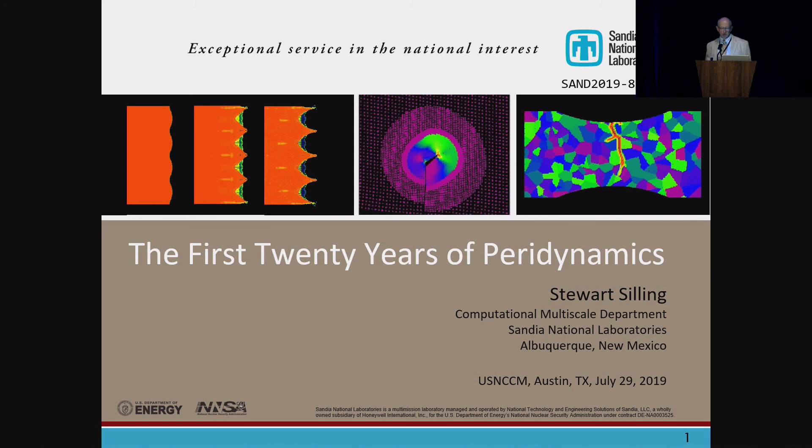First, I will try to explain what the theory is for and what it seeks to accomplish. The main thing it was intended for was the modeling of fracture. So I'll try to explain how fracture modeling works in peridynamics and where things stand with respect to that major objective.

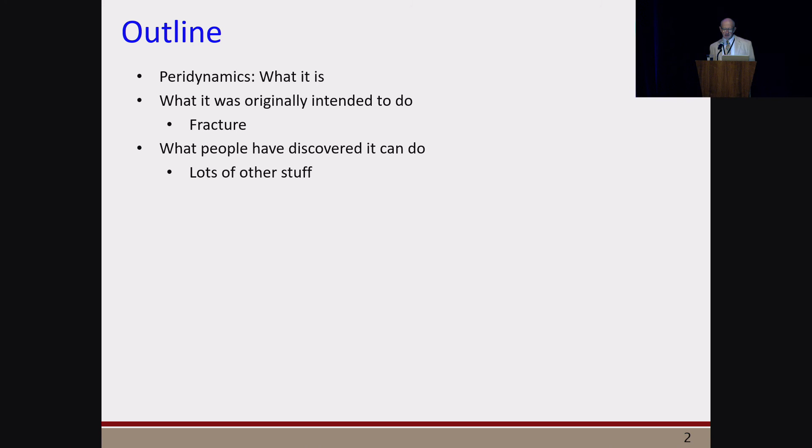And then I'll talk about other things that people over the years have discovered peridynamics is useful for. I hope that by the end of this talk, most people will agree that peridynamics is a reasonable theory that doesn't violate any laws of physics or mathematics at least, and is useful for some applications.

To motivate what peridynamics is, consider the problem of understanding what goes on in the process zone near a crack tip. It is widely believed that what goes on in that process zone is the culmination of many interacting physical processes, some of which involve the nucleation and initiation of pre-existing defects.

But somehow, the mystery is that a point starts out where the deformation is continuous, and somehow it ends up at a point of discontinuity, in other words, on a crack surface. So how to model that within a continuum mechanics theory is, to me, a deep mathematical mystery, and that is something that peridynamics may be able to help understand.

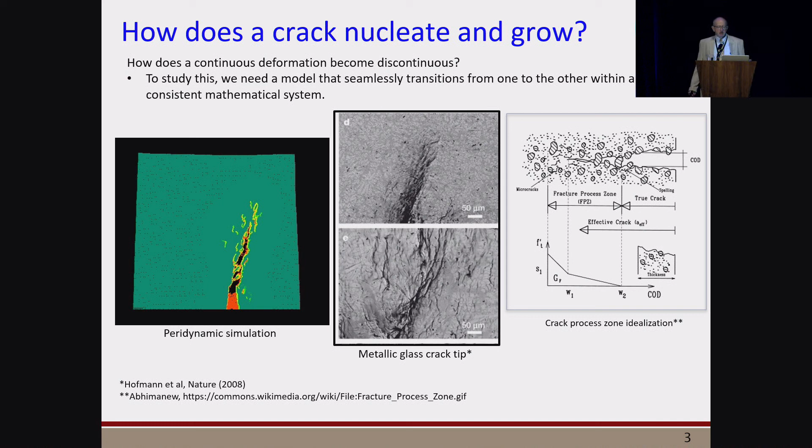So the ideal mathematical tool for simulating this problem would be a theory which seamlessly transitions from continuous to discontinuous deformations, reflecting the process I just described, where a point starts out in a continuous part of the deformation and ends up on a crack surface.

So to understand the point of departure of peridynamics from traditional approaches, what I've listed here are some peridynamic answers to some simple questions about how to model fracture. The first is, why is fracture different from other kinds of deformation? The peridynamic answer to that question is, it isn't. It's all the same. So why are special techniques needed to model fracture? The peridynamic view is they're not.

Why does everybody think they are? Because nearly everybody is used to applying a theory of continuum mechanics that relies on PDEs. The problem is that in order to make a PDE work, you need to be able to evaluate the partial derivatives of the deformation everywhere. Of course this assumption breaks down on a crack, where the deformation is singular.

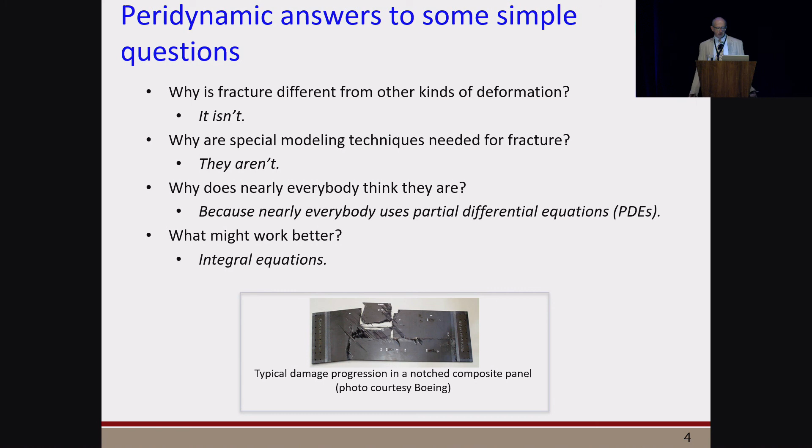So how can we avoid this problem mathematically? What might work better? The peridynamic view is that integral equations might work better, and that's what we're going to try to use.

The momentum balance in peridynamics is an integral equation that sums up force interactions along what are called bonds, characterizing the force density exerted on any point x by its neighbors q within some cutoff distance for these force interactions. That cutoff distance is called the horizon, which may be viewed as a material property.

So this is a different mathematical picture from the standard Cauchy PDE, which would have this term for the internal force interactions replaced by the divergence of a stress tensor field. The stress tensor is basically not used in peridynamics, because that is where all the partial derivatives live that we want to omit.

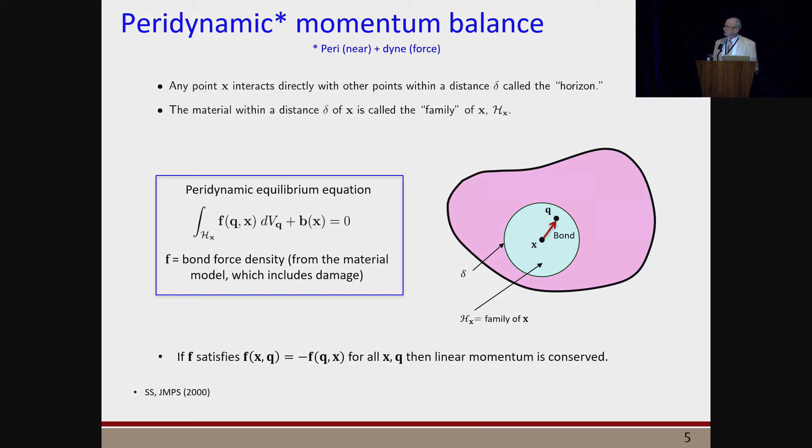If this force density obeys this symmetry or anti-symmetry, then Newton's laws are automatically satisfied. Linear momentum is conserved. Angular momentum conservation is guaranteed by additional requirements on the material model. Now, what a material model does in peridynamics is it evaluates this function F representing the bond forces.

Since this is a numerically oriented conference, I will jump ahead to the simplest numerical discretization, which involves simply replacing this integral by a finite sum. The sum is over nodes that are defined to have a definite mass and volume in the reference configuration.

So some good features about this discretization, which is really kind of the workhorse that most people in the community use, are first of all that it's simple to program. Another is that it conserves linear and angular momentum exactly, provided the underlying material models do the same.

In fact, this discretization itself, if you think of it as a body in which the mass is distributed on delta functions, you can think of this discretization itself as being a peridynamic body. So what's interesting about that is any result about the continuum model automatically applies to this discretization, and that's not true of all possible discretizations of the peridynamic equations.

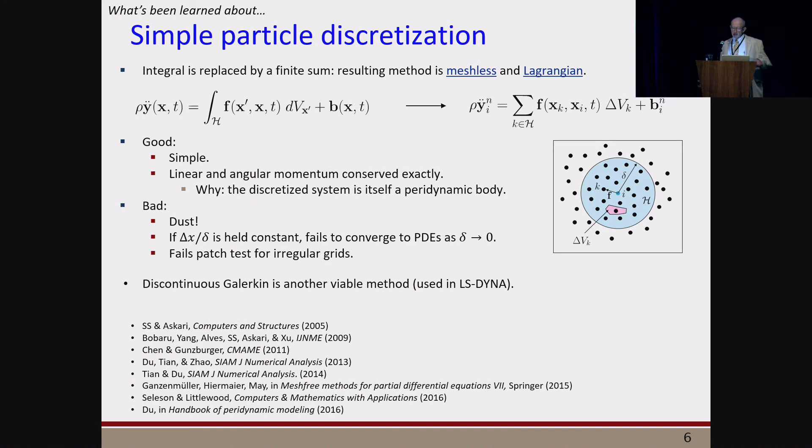If you consider the convergence as the horizon approaches zero, and change the discretization so that a constant mesh spacing exists, through the number, the ratio of the grid spacing to the horizon is constant, then it's been proven by Professor Du at Columbia and his team that this discretization converges, but sometimes it converges to the wrong thing. So that's called asymptotic incompatibility.

The simplest material model in peridynamics is called microelastic. And what that means is each bond responds independently of all the others within the same family.

So in a linear microelastic material model, the model is just a graph of bond force versus bond extension, in other words, elongation of the bond. And in a linear microelastic material, this is a straight line. However, the force density vector in the bond rotates along with the bond as the bond deforms, so in a sense, you get geometrical nonlinearity for free in spite of this apparently linear behavior.

So this is useful in modeling all kinds of problems, such as buckling.

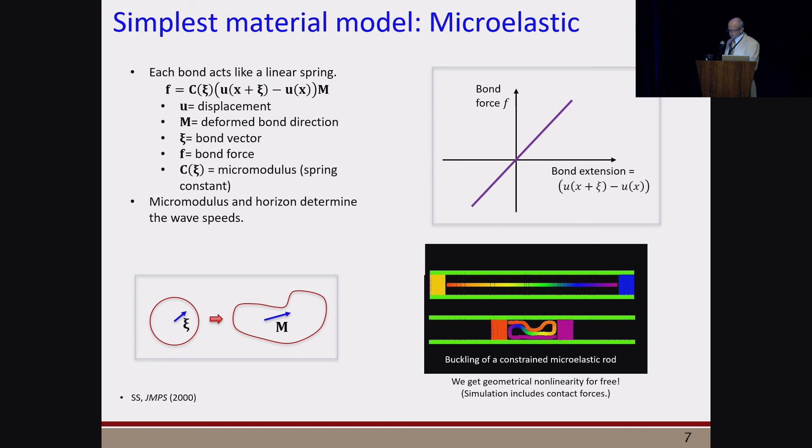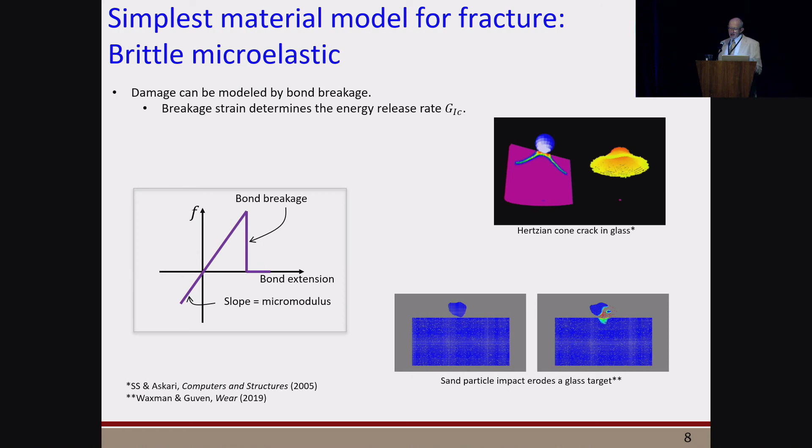To model damage, one thing we can do is apply a bond breakage criterion, meaning that when the bond extends too far, it breaks irreversibly, after which it no longer sustains any load. And just using this simple concept of damage, you can simulate all kinds of interesting things with this meshless discretization, such as Hertzian cracking in a brittle material, and also erosion by impact of particles on a brittle target.

Fracture occurs spontaneously or autonomously, meaning that nobody is telling cracks what to do. When one bond breaks, its neighbors are more likely to break, leading to a process of progressive failure. So peridynamics has proven to be useful in simulating problems like fragmentation, where there's a need to simulate many mutually interacting cracks that can grow in any direction.

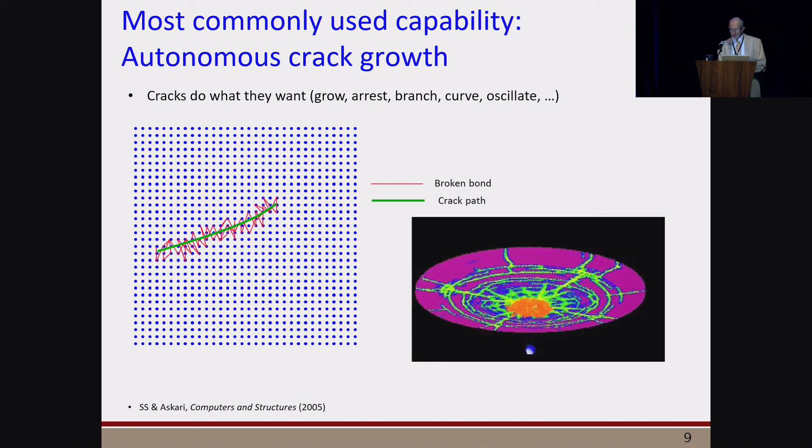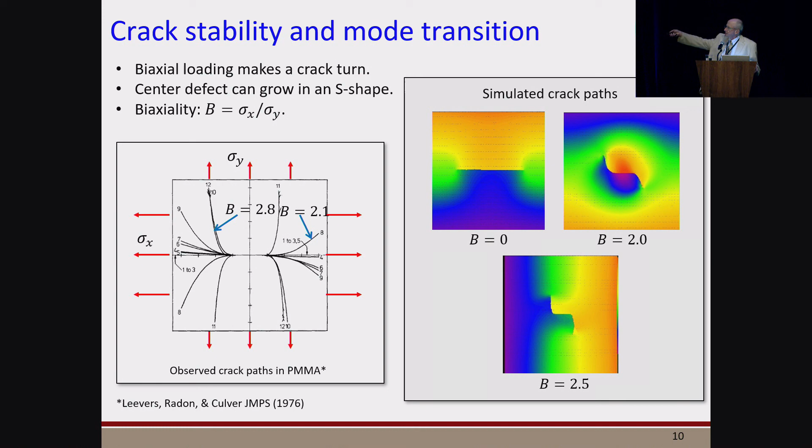Crack stability is reflected in this autonomous crack growth idea. These are simulations of a brittle plate with a center crack in biaxial tension. We're pulling both vertically, which starts the crack growth, and also horizontally. If the horizontal stress is sufficient, it becomes energetically favorable for the crack to turn. This is a form of crack instability because it can grow either one direction or the other, resulting in these S-shaped looking crack trajectories reflected in the simulation.

Historically, it would have been nice to spend 5 or 10 years establishing the fundamentals of the peridynamic method in simulating simple problems in fracture mechanics. The reality didn't work out that way.

Peridynamics got started around the year 2000. After 2001, after the 9/11 attacks, there arose a need to analyze the possible impact of airplanes onto nuclear reactor containments, which are big, heavy, reinforced concrete structures designed to keep radioactive contaminants inside the building if a nuclear reactor accident occurs. When a situation like this arises, if you work at a national laboratory and you're fundamentally an engineer, as I am, you can't just say, sorry, my method isn't good enough yet, come back in 5 or 10 years when it's perfect. You have to use the tools available at the time. So that's what we did with peridynamics.

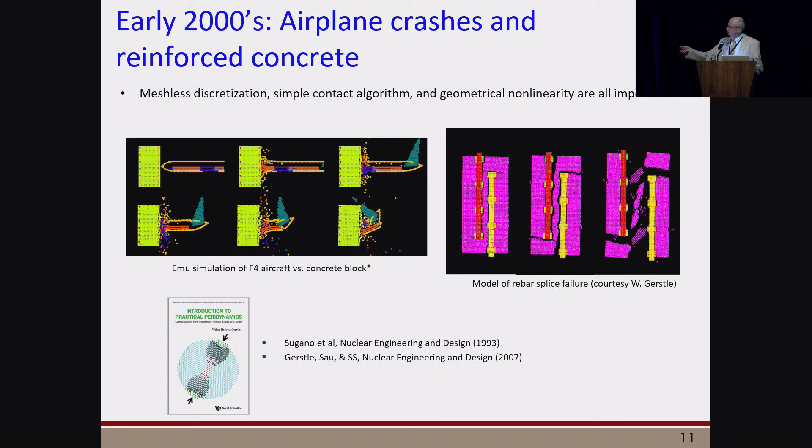Professor Gerstle at the University of New Mexico has developed a fast-running peridynamic code that he uses for modeling all kinds of problems involving reinforced concrete, and he wrote a book about this method shown here.

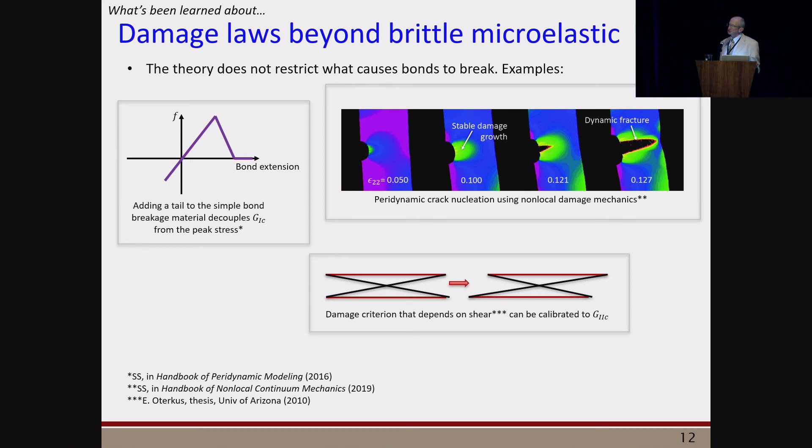You can also implement bond failure criteria that respond to rotation angle between bonds, in other words, shear, allowing you to independently specify G2C as well as G1C. And you can do fancier things like develop a nonlinear or non-local damage mechanics approach to failure of bonds.

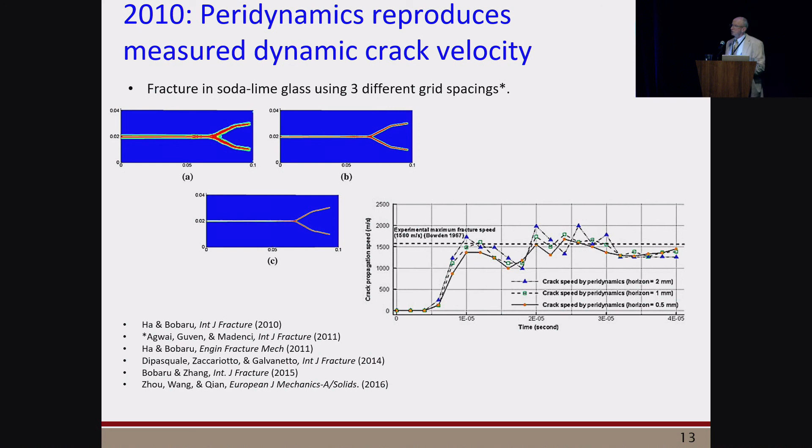Professor Bobaru and others have studied pretty carefully the properties of the peridynamic method in simulating dynamic fracture in brittle plates. These are some of their results showing convergence in a rather subtle problem, which is crack branching in a glass plate. Their results also show approximately the right asymptotic crack growth velocity, related to the Rayleigh wave speed in a brittle material. So that's sort of a success story.

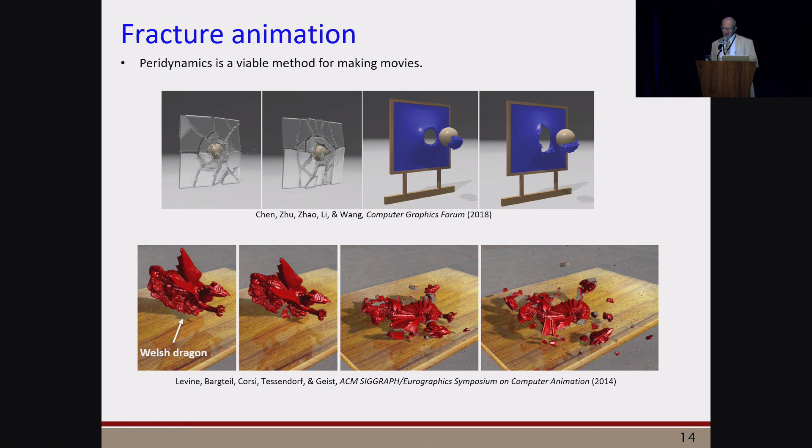People have looked at a lot of other possible uses of peridynamics in simulating fracture. For example, there's a need in the movie industry for computer methods to animate fracture, make movies involving fragmentation and fracture. These are from a paper that appeared several years ago in the computer animation community. This is called a Welsh dragon, which is apparently something people like to model in that community. I don't really know whether peridynamics is fast enough to become very popular in that community, but it's interesting that it gives these nice results.

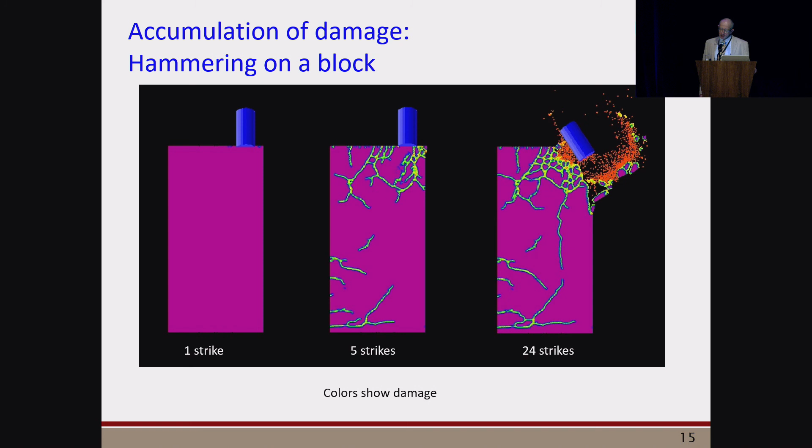One feature you get for free with peridynamic modeling of damage is you accumulate these broken bonds over time. This is a simulation in which we hit the edge of this brittle plate with a hammer many times. Each time you hit it, the damage that was already there grows farther, plus you introduce new damage. Eventually the hammer breaks through, and you can see some of this so-called peridynamic dust created in this meshless discretization.

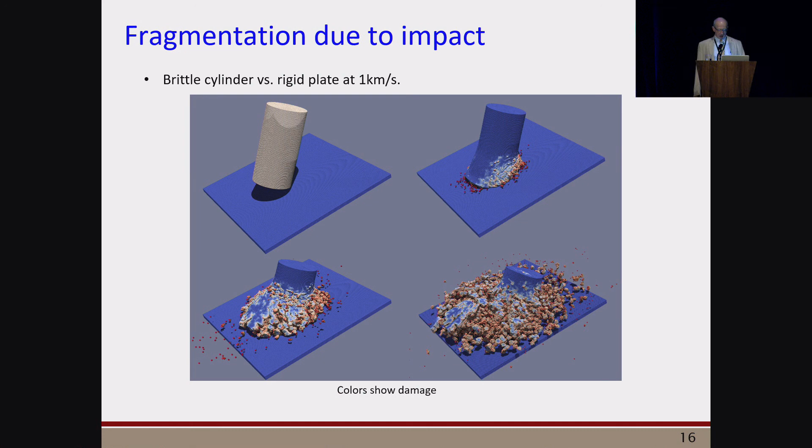Fragmentation is another natural application of this method because you can simulate a lot of mutually interacting cracks without having to specify the growth of each one according to some external criterion.

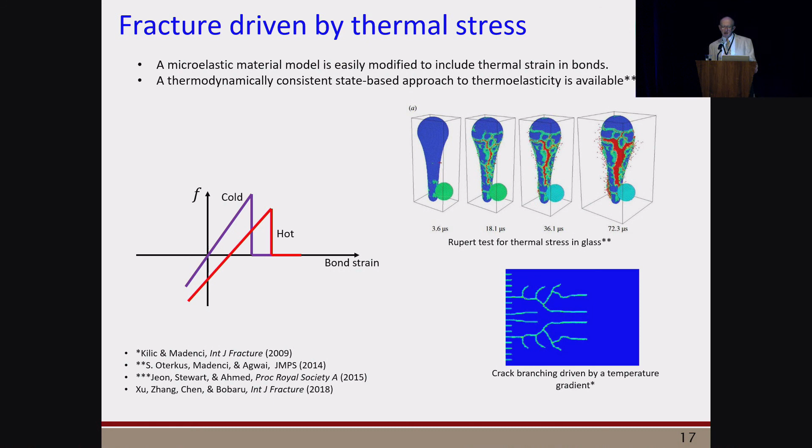Other applications include thermally driven cracks, such as this interesting pattern obtained in glass, in which there is a temperature gradient from left to right. This is a simulation that some researchers at Corning did, studying the residual thermal stresses in glass.

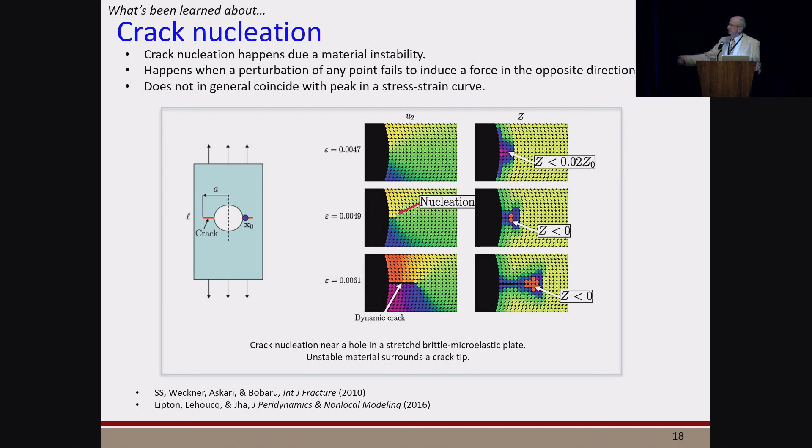At the beginning, I referred to this mysterious process by which cracks appear and grow. What we've learned a lot about in the past 20 years regarding crack nucleation is that in peridynamics, it can be viewed as a type of material instability in which bonds start exceeding the maximum in their force versus extension relation. In effect, the wave speeds become imaginary, resulting in a material instability that results in the nucleation of a crack. This same instability exists as the crack grows ahead of the crack tip.

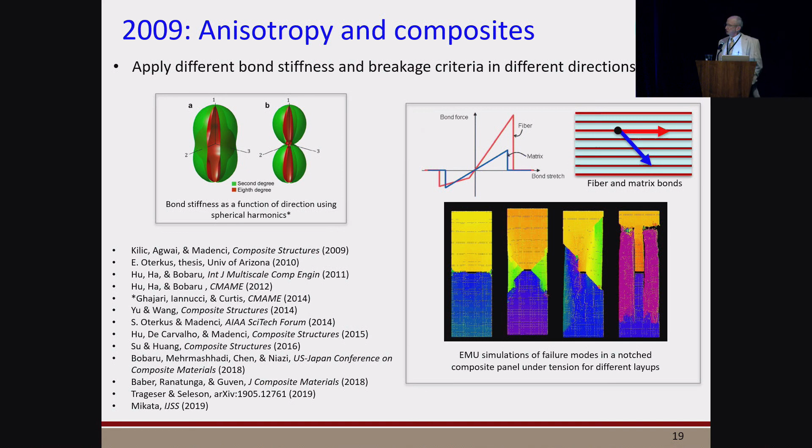Anisotropy can be modeled by allowing the bond properties to vary with direction. So in a lamina, in a unidirectionally reinforced composite, you can have bonds parallel to the fibers that are much stiffer and stronger than all the other bonds. You can also have the bond properties vary continuously according to a function like this spherical harmonic pattern shown here. Just using these concepts of anisotropy, you can reproduce a lot of realistic features of damage and fracture in composite laminates used in the aerospace industry.

Dr. Patrick Diehl at Louisiana State University has done a great service to the peridynamics community by compiling, in a review article in the Journal of Peridynamics and Non-Local Modeling, many of the validation studies done over the past two decades. The first issue of this new journal appeared earlier this year, and we hope that someday it will become the first choice for people working in the peridynamics and non-local modeling communities.

Why should you publish in this journal rather than a more established journal? Well, for one thing, I think most of us in the peridynamics community have experienced getting reviews after 6 months, and the reviews say, 'I've never heard of peridynamics. What is it? I can't accept your paper.' So I anticipate that if you submit papers to this journal, you won't get reviews like that.

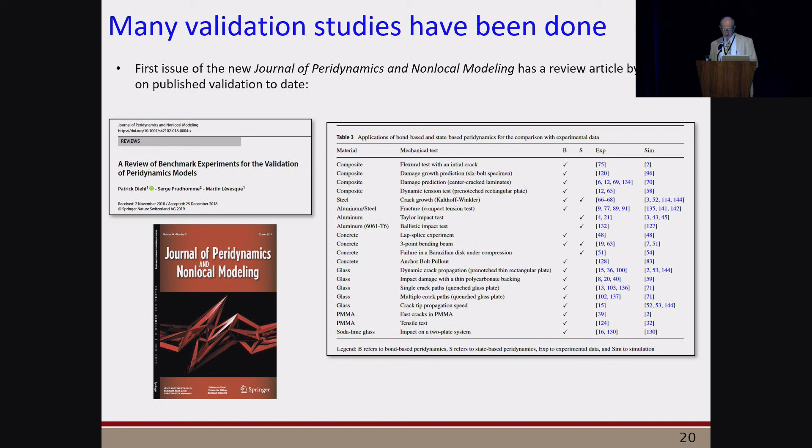There have been a few books that have been written. I already mentioned Walter Gerstle's—there's a handbook of peridynamic modeling, Madenci and Oterkus's book, and a couple of others.

In 2007, in response to the lack of generality of bond-based materials like the microelastic material I talked about before, we started working on state-based material modeling, which is a more general version. The problem with assuming each bond responds independently of all the others is that it results in restrictions on the material properties you can reproduce. Notably, you always get a Poisson ratio of 1/4. So to avoid that, we developed a more general framework for material modeling called state-based rather than bond-based.

The idea is that the bond forces are determined not only by the deformation of the individual bond, but also collectively by the deformation of the entire family. Using that generalization, you can simulate interesting things like fluid fracture, so to speak, as well as fluid-structure coupling.

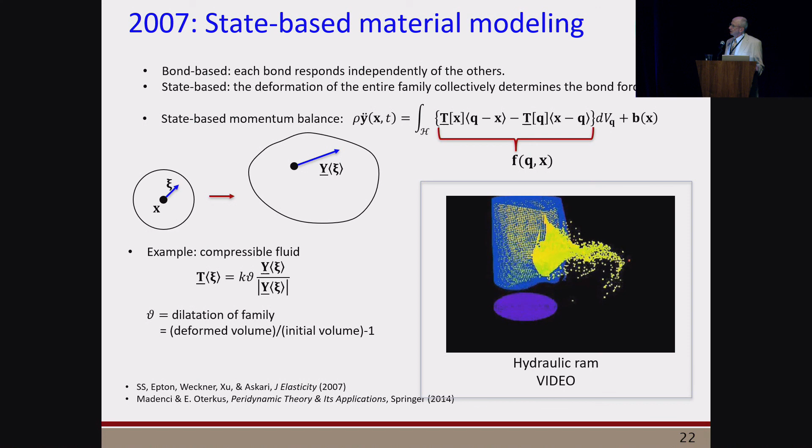This funny-looking notation is state notation, and these are non-local operators that allow you to manipulate these families of bonds and functions of those families of bonds in a compact form. I won't have time to go into the details, but using this type of notation, in spite of the complexity of determining the dependence of bond forces on the totality of deformation of their family, you can precisely specify everywhere in a body what the bond force is in terms of the deformation.

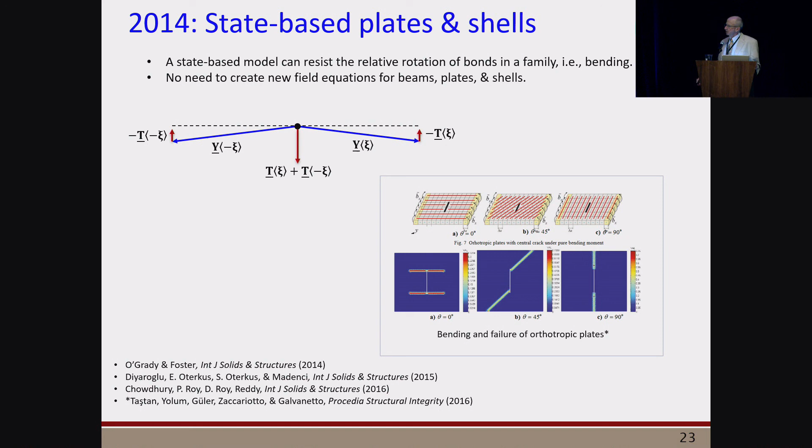As an example of the power of state-based material modeling, this is one possible way of modeling plates and shells as state-based peridynamic materials. The idea is that the material model resists relative rotation between bonds that are in the same family—in other words, it resists bending. That notion of modeling plates and shells can be combined with appropriate damage modeling for those kinds of structures, resulting in realistic-looking failure patterns.

The most widely used state-based material model is called correspondence materials. In those materials, a conventional stress-strain relation from the standard theory is used as an intermediate step in determining the bond forces. That's a great convenience because you can recycle all your favorite material models from a finite element code.

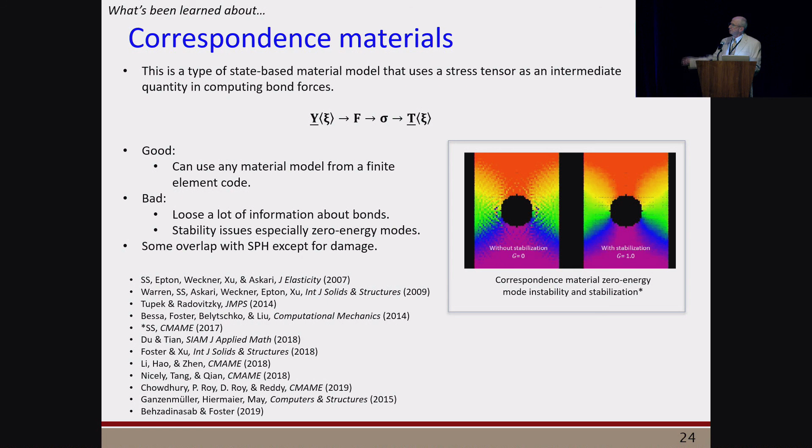The problem is there are a lot of practical issues, like zero energy mode instabilities, that arise. But many people have looked at that problem, and there are a number of proposed ways of mitigating those, and all these methods seem to work pretty well. So correspondence materials are kind of the workhorse for modeling ductile failure in peridynamics, and most of the time they work pretty well.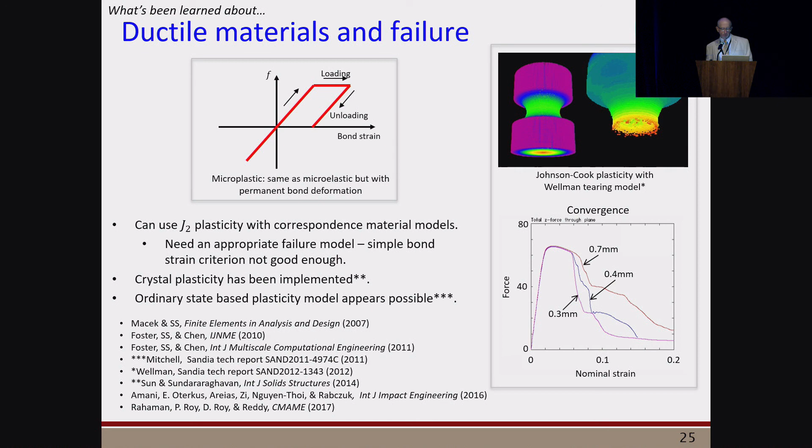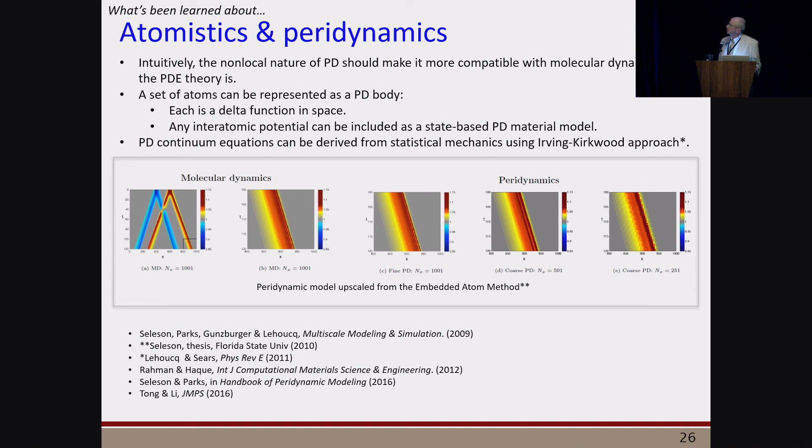Because peridynamics is a non-local theory, there is the possibility of using it more effectively than the standard theory as a way to coarse-grain atomistics and to implement atomistic-to-continuum coupling. There have been some studies of that, but it seems to me there's a lot more that could be done in the future. Interestingly, you can go directly from statistical mechanics to a peridynamic continuum model, and that result was explored by Lehoucq and Sears in about 2010.

One of the things we've learned a lot about over the past 20 years is the relation of peridynamics to the Cauchy theory. You might expect that as we reduce the horizon to zero, we should in some sense recover the standard PDEs. And that's exactly what happens provided the deformation is continuous.

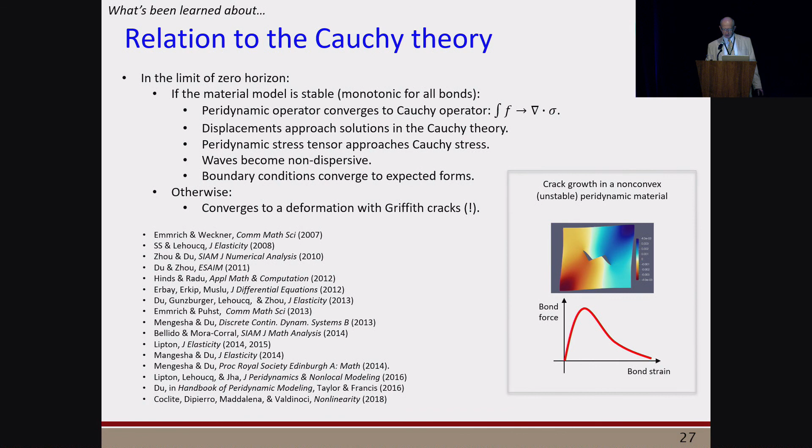Interestingly, if you have a non-convex elastic peridynamic material, meaning the bond forces go up and then down, the limiting case as you reduce the horizon to zero is you get Griffith cracks. In other words, jump discontinuities in the deformation that consume a definite amount of energy per unit surface area as they grow. And then you get the PDEs away from this jump discontinuity. So that's a very interesting result that Professor Lipton at LSU and his team have explored.

There continue to be some usability issues with peridynamics, especially with this meshless discretization that a lot of people use. Boundary conditions are different than people are used to with PDEs. The material properties of nodes are affected by how close they are to a free surface. That's sometimes called the surface effect in peridynamics. You also tend to get this dust phenomenon that I mentioned.

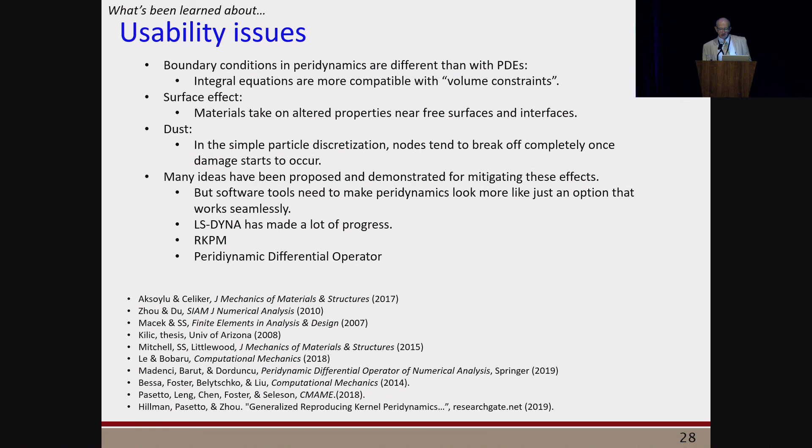So even though there are a lot of proposed fixes for this, I think what would be a good thing to do is have a committed team of software-oriented people who are willing to dedicate themselves to making Peridynamics look more like the standard finite element tools that typical engineers are accustomed to using.

Because Peridynamics is a non-local theory, linear waves are dispersive, and that's both good news and bad news, as we've learned. It's good news because real materials are dispersive, at least at small enough length scales. This provides an opportunity to fit measured dispersion data from ultrasonics or other techniques to a peridynamic material model that would reproduce it.

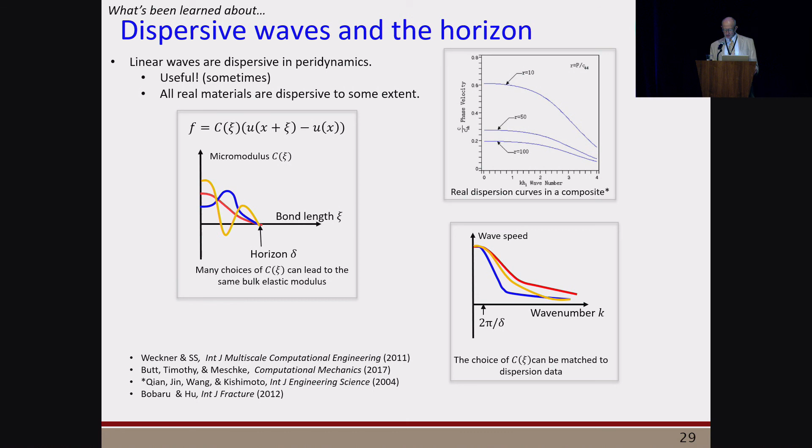However, dispersion can also be kind of a nuisance in macro scale simulations where it can non-physically alter simulations of wave propagation in some applications.

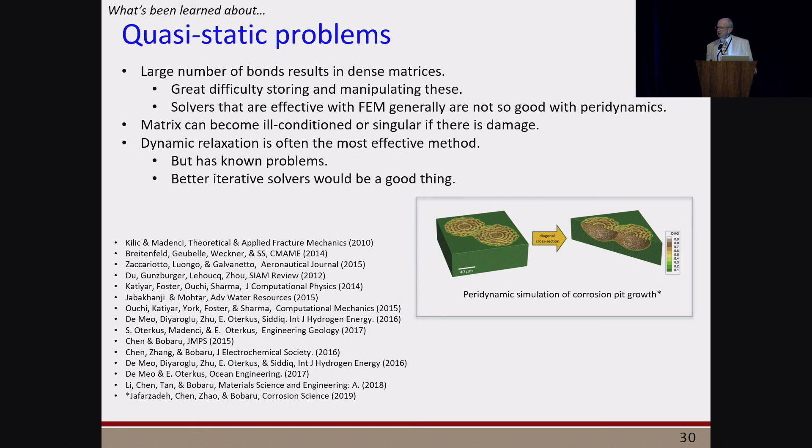Another thing we've learned is that in trying to solve quasi-static problems, the fact that in peridynamics there are so many of these bond interactions for each node, you get matrices that are much more dense than you would in a finite element code. And as far as I know, tools for dealing with these dense matrices or even storing them are a challenge. As a result, most people continue to use dynamic relaxation, which is reliable, but it has some known limitations.

I think the basics of the mechanical and even thermodynamic theories, including non-local diffusion, have been worked out. But the sky is the limit in terms of dreaming up new material models to accomplish different things.

As I mentioned, a plate and shell theory within peridynamics can be implemented just by choosing the right state-based material model. This is in contrast to standard plate and shell theories where you have to invent a whole new PDE, a fourth order PDE, which does not follow immediately from the second order PDEs of the standard continuum mechanics theory. And there are other examples of that in which just by choosing a peridynamic material model, you can reproduce phenomena like solitons that in the standard theory would require the development of a whole new PDE.